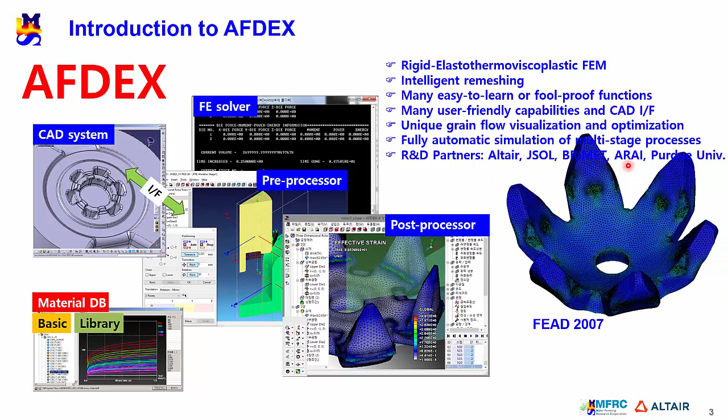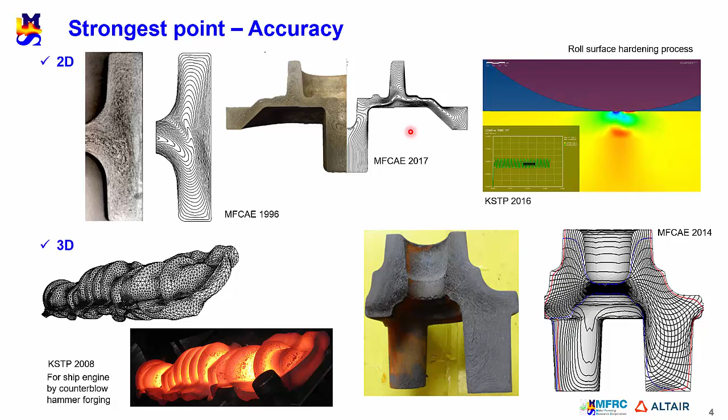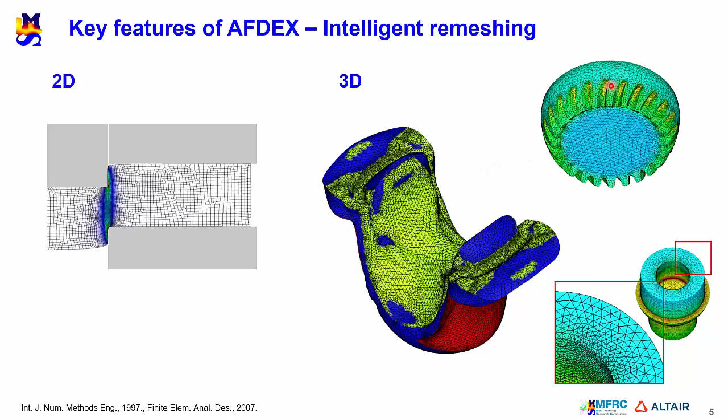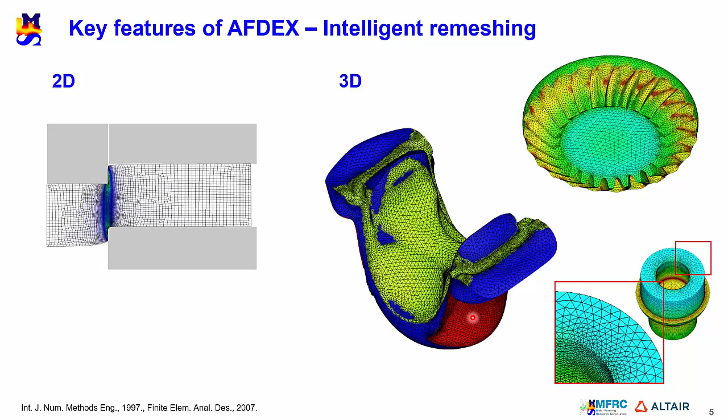Remeshing is of great importance. In structural engineering, the more advanced FE mesh system, the better the result. It's true, of course. To the contrary, in bulk metal forming, small finite elements may cause too frequent remeshing, especially around sharp concave corners. So the appropriate element size for metal forming process exists, which trades off the interpolation error and remeshing error. When the mesh system describes the material with acceptable accuracy, it can be a good engineering solution. You can see that all mesh systems here describe the material with good geometric accuracy in terms of the tolerance. For example, these chamfered corners were well described with a limited number of finite elements.

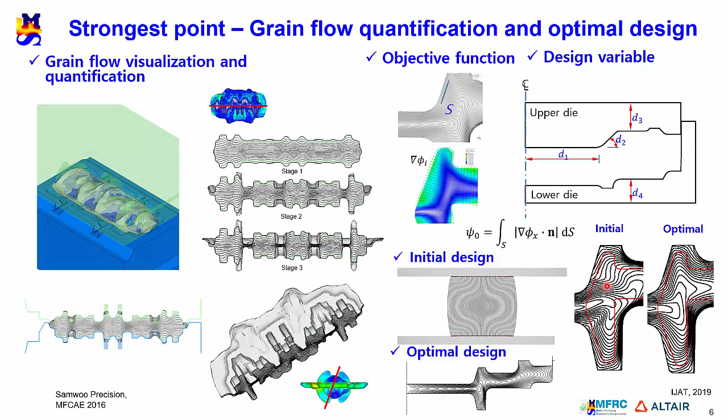From now on, I'm going to introduce some strong points of AFDEX. First, let me introduce how we can visualize the grain flow lines and use them for process optimal design. We developed a unique method to treat the grain flow lines not as a figure, but a function, so we can visualize them at arbitrary cross sections immediately. So we can use this function as the objective function because normality of grain flow density, that is the gradient of grain flow function, to the surface that is generated by material removal, is important. We assign these geometric parameters as design variables, and we obtain these optimized grain flows starting from these initial grain flows.

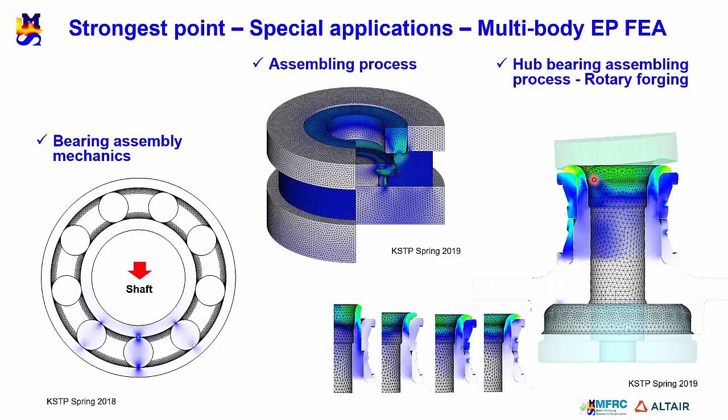For the second strong point, I'm going to introduce several multi-body problems. This example shows stress distribution in a bearing test process. Elastoplastic function was applied. The lateral displacement of the shaft was increased until plastic strain appears to some extent around here. A special mesh repairment scheme around the contact region was applied. This is a conceptual process of assembly of 3 parts using 3 dies. A punch presses the material to form, and the binder die is imposing force on the material. This is another assembling process of a hub bearing unit using rotary forging. We can observe the residual stress after the rotating tool moved off.

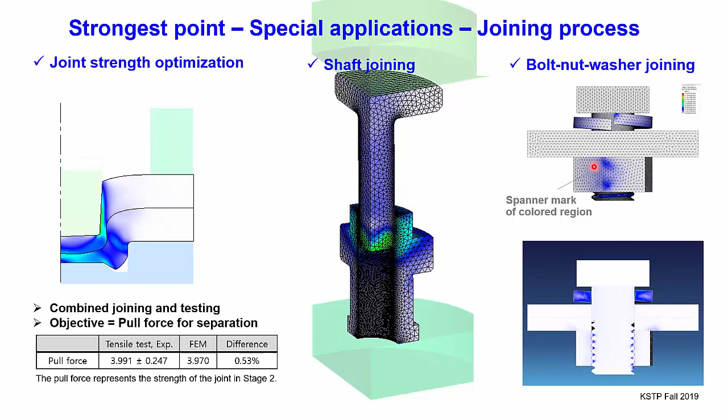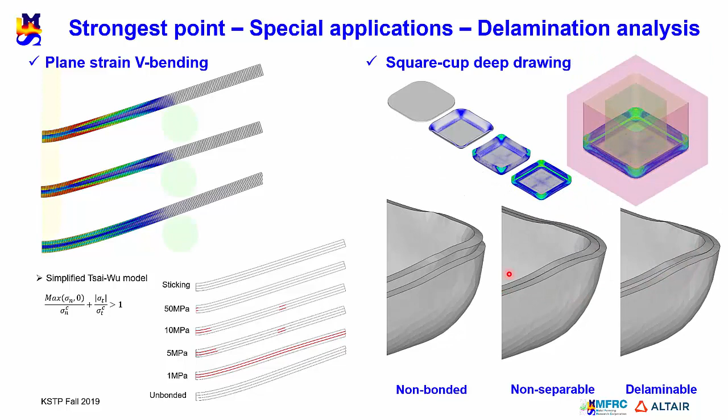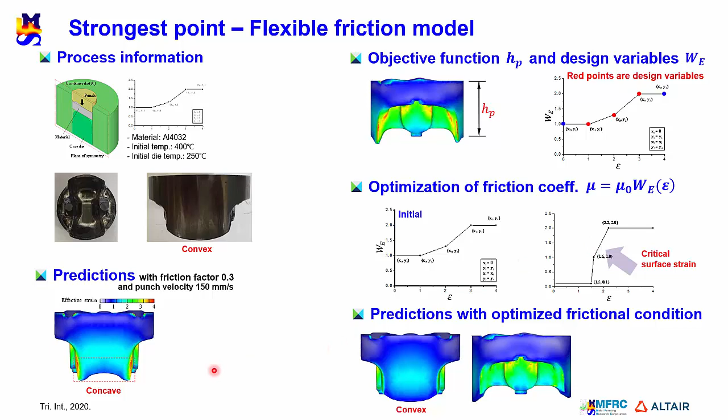So we used this optimized friction function of strain instead of the constant friction, and could obtain this result that is quite similar to the actual shape. I'd like to note that we optimized this initial function to maximize this length using HyperStudy and obtained this optimized function for coefficient of Coulomb friction. You can find some more details on this topic from Tribology International this year.

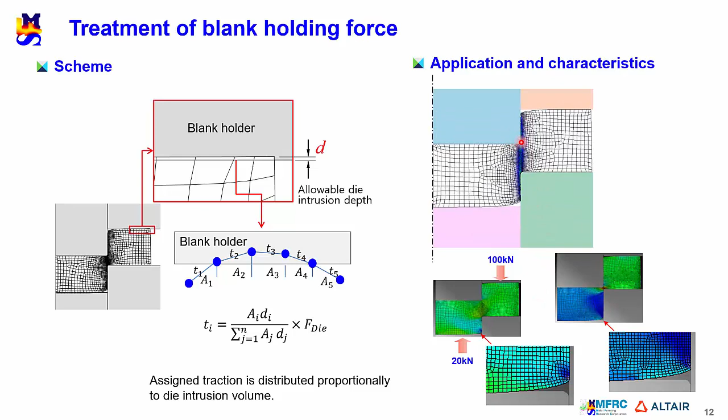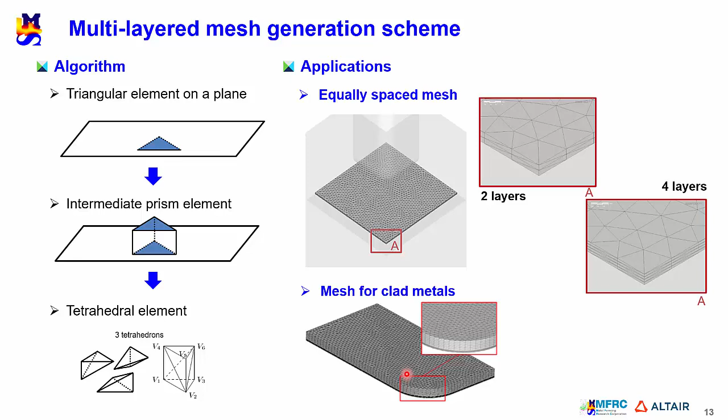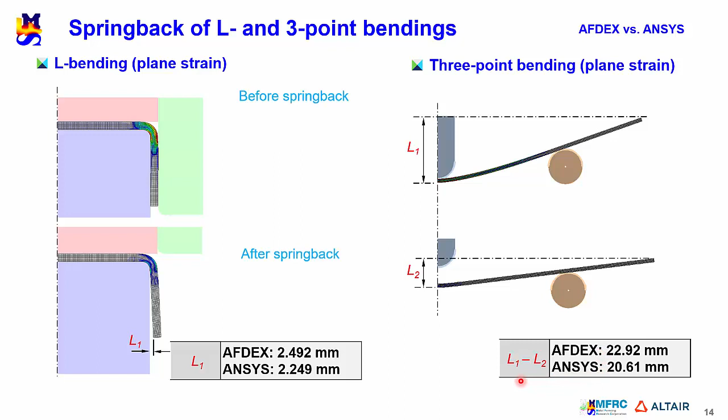We applied AFDEX to L bending and 3-point bending, which are simple but sensitive to the numerical schemes employed. We compared our predictions with those of ANSYS. We concluded that our predictions are acceptable. Of course, ANSYS predictions are not absolute references because there are no exact solutions.

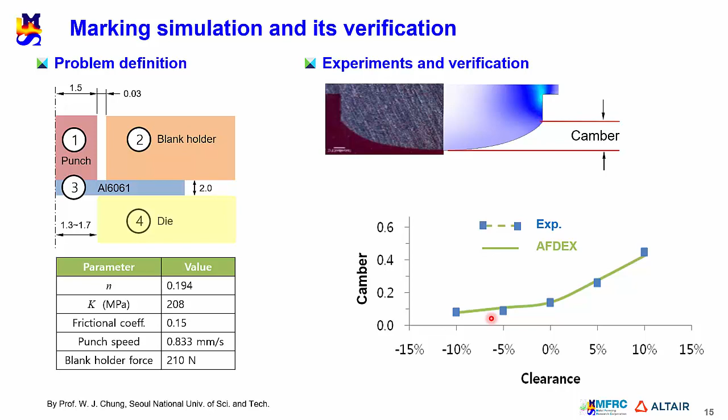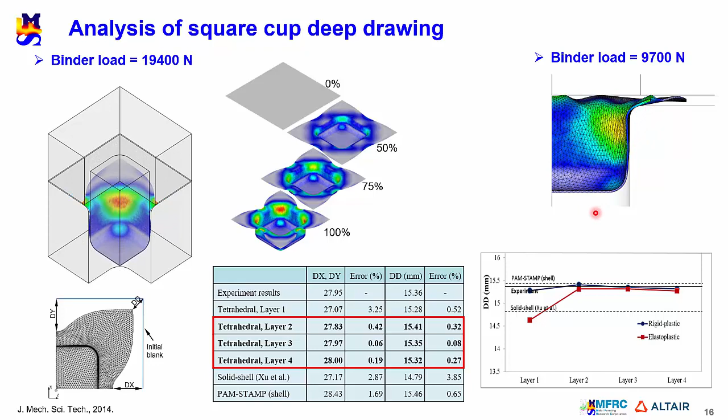A square cup deep drawing process was simulated to investigate the effects of number of layers on the predictions. We found that 2 is good for minimum number of layers in this case, as can be seen in this comparison. With an abnormally small binder load, we obtain irregularly shaped material, as can be seen here.

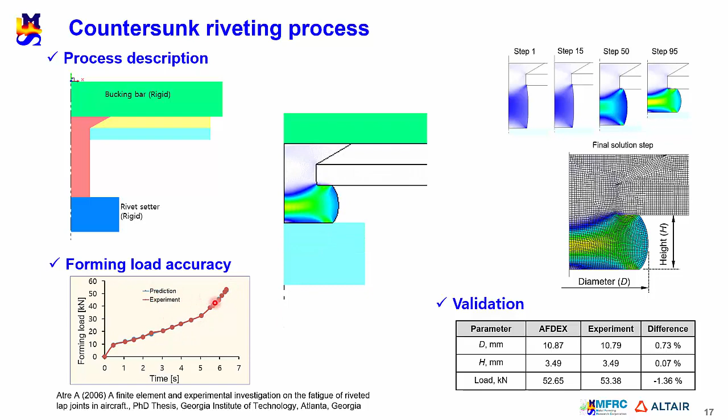This is an example of a riveting process for aircraft application. The detail about this process was obtained from a PhD dissertation of a U.S. university. A comparison of forming load between our predictions and experiment in this figure shows an excellent agreement.

Now I'm going to introduce some typical applications and give a conclusion. From application sense, the most important things for plate forging or sheet metal forming simulation by bulk metal forming approach include the diversity of die motions. From now on, I'm going to introduce some typical examples with emphasis on die motion. Just seeing is understanding or knowing, of course.

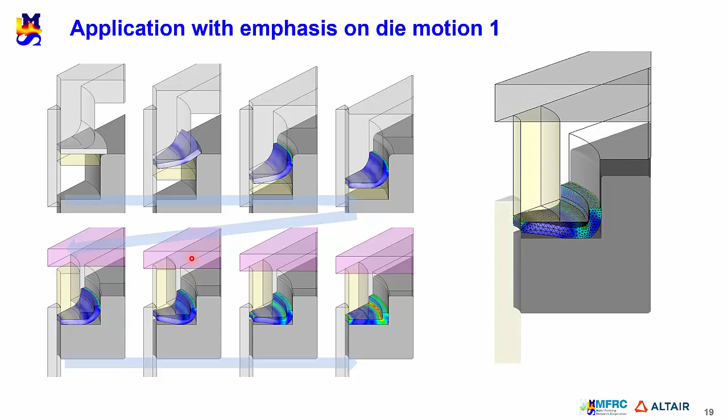In the first stage, in this case, the material is supported by light yellow plate with hydraulic cylinder or spring. In the second stage, light yellow die part pushes down the material by a spring, moving downwards first and then upwards. And finally, it moves down in the same velocity with a punch after 2 dies contact.

In this example, in loading stage, a little darker blank holder in the upper side pushes down the material by exerting the given force in the earlier stroke, and it moves down with punch and presses the material after the contact between punch and the binder is made along their interface.

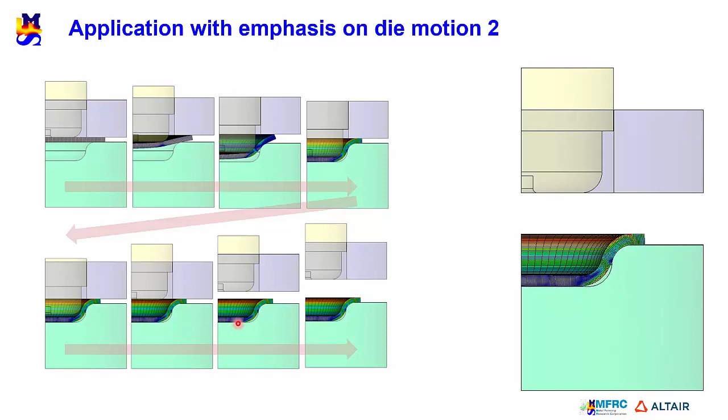In the unloading stage, the reverse motions of punch and blank holder were realized while a springback analysis was conducted. In this example, motion of upper dies is almost the same as the previous one.

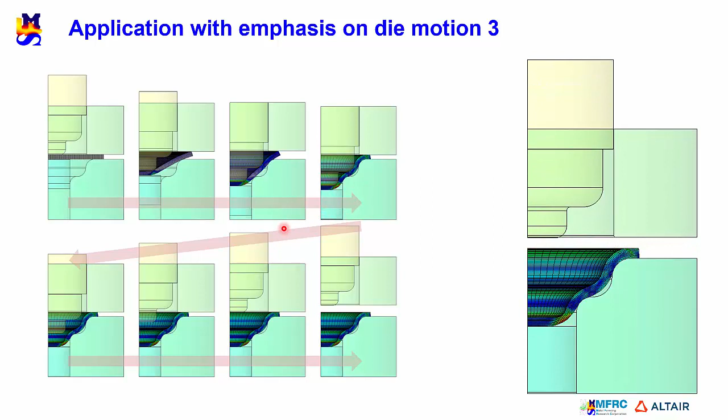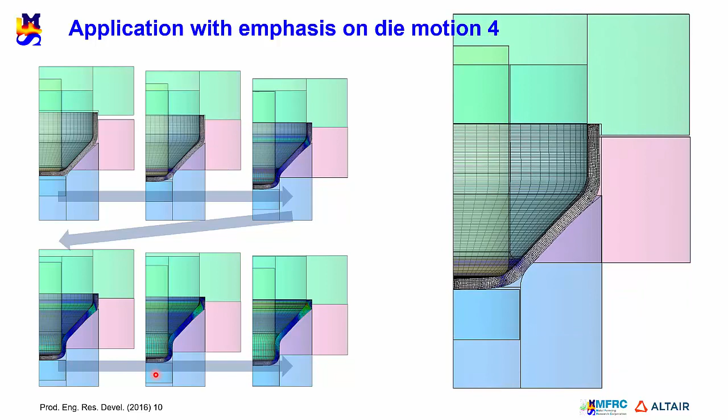However, there is a combined die in the lower side which imposes force onto the material in the early stroke, but it will constrain the motion of material after it touches the bottom. In this example, the punch moves down with upper side die, which pushes down the pink color sleeve die after contact with it. This supporting die imposes the given force onto the material to push it upwards. The given force can be a function of its absolute stroke or relative stroke to the other die part.

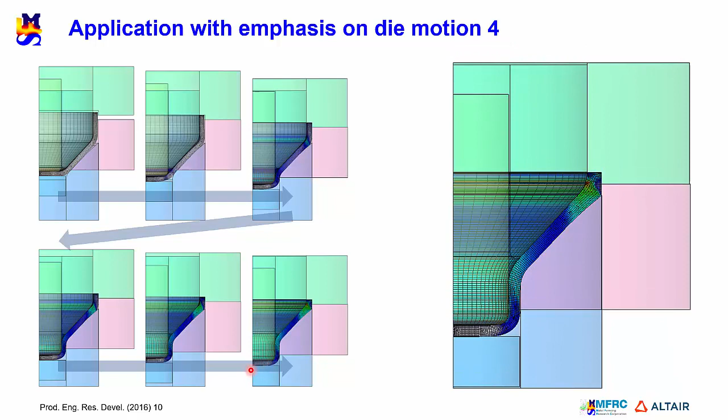In this process, the main punch and side die move down initially in the same velocity up to a position and to this position. Then only side punch continues to move down while lower punch starts to move outwards from the position.

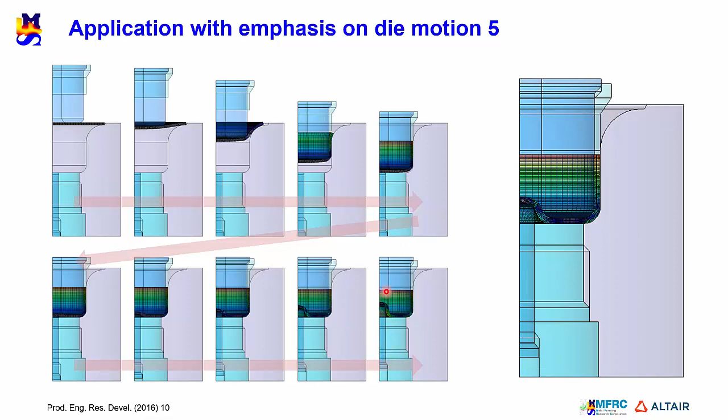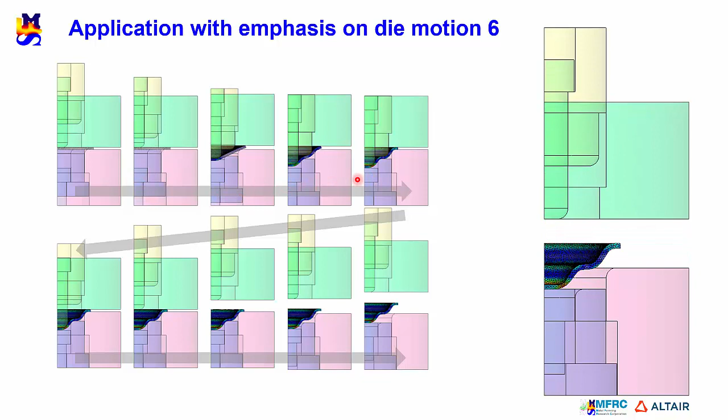In this process, two inner upper die parts move down in the same velocity, while the outer upper die pushes the material by the given force before contact with the other upper die part is made. Of course, after the contact, all die parts move down identically during loading action. During this loading action, this lower die supports the material with a given force, which may change with stroke or time. The ejection process was also simulated.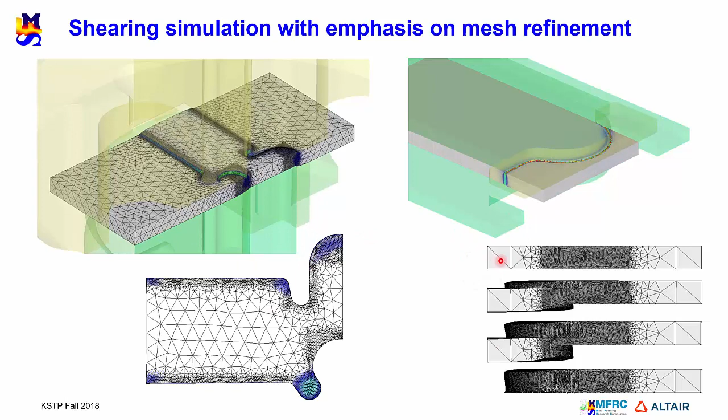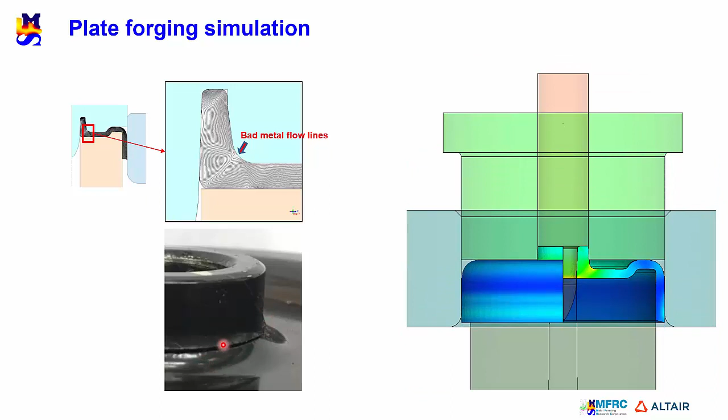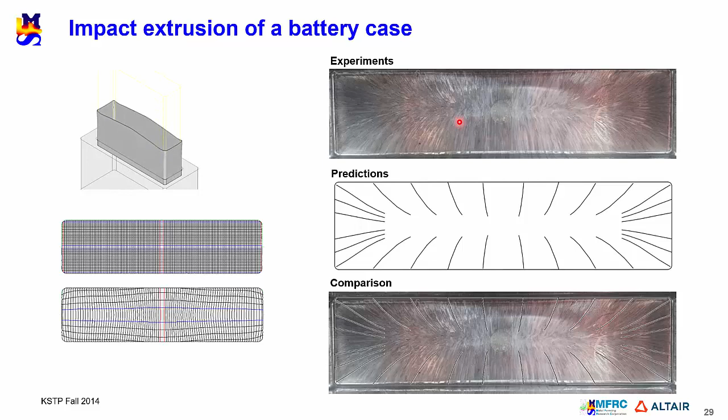This is a special example of impact extrusion of battery case. We compared the flow mark in the bottom side of the material, revealing a good agreement between experiment and predictions. Of course, modeling friction is of great importance in this kind of applications. As already introduced, we are supporting the users with a generalized friction function of pressure and temperature, as well as strain.

Sheet metal forming process was simulated by a solid element approach. One of the hot issues in this field of sheet metal forming simulation is finite element analysis of the sheet metal forming process using solid elements. This kind of approach can solve the inherent defects of traditional sheet metal forming simulation technology based on shell or plate elements, for example, local thinning phenomena.

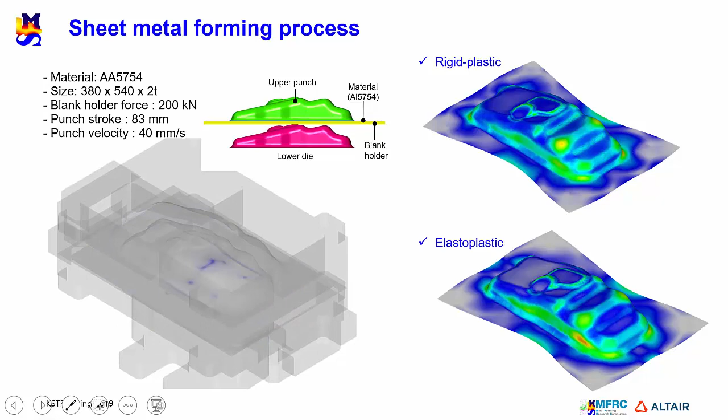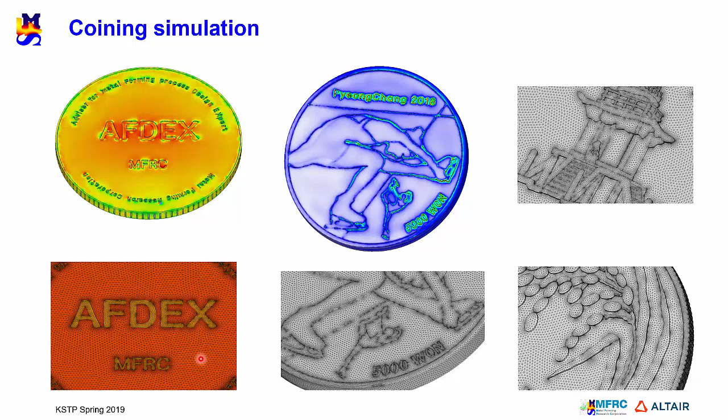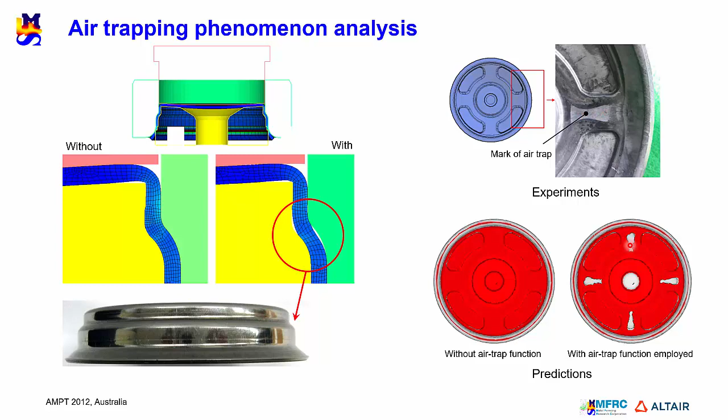In coining simulation, selecting proper number of mesh is one of the important factors, which can make the surface accurate or blurry. To obtain a good quality of the coining simulation, we are working on increasing mesh density on the selected surface and coarsening on the other surface. In plate forging process, where high pressure is exerted on the enclosed die surface, air trapping may happen, leaving some marks or remains which can be considered as non-standard cases.

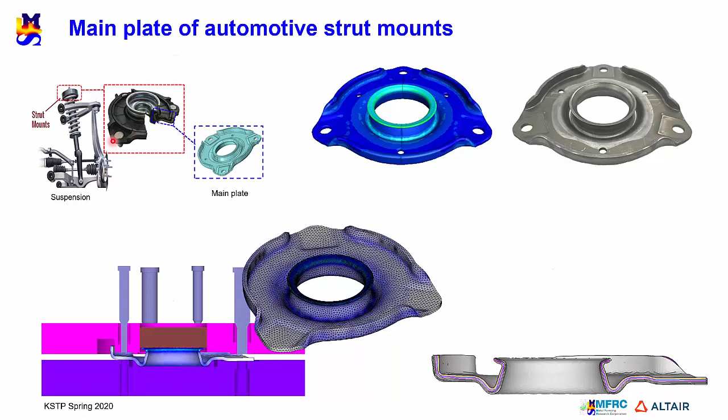Finally, let me introduce an application to develop a typical plate forging process for an auto part. The entire process was simulated using elastoplastic finite element method with spring back considered in a fully automated way.

Metal forming is creativity itself, and customers are the source of our new ideas, especially of die motions and/or functions. We thus need in-depth cooperation with our customers, as we are doing it successfully with pioneering users in this field. I would like to give special thanks to early users in Japan and Germany for their contribution to advances in plate forging simulation technology of AFDEX.